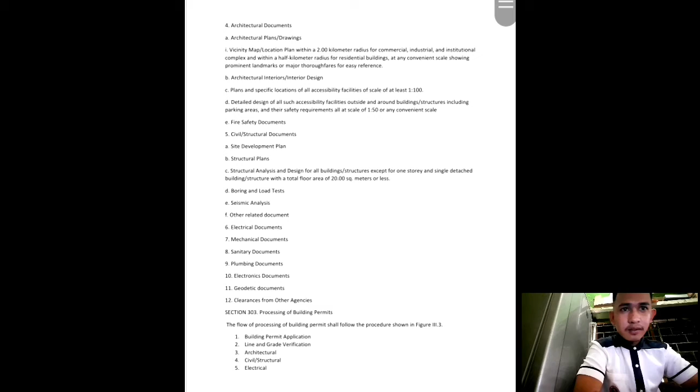D, Detailed design of all such accessibility facilities outside and around the building structure, including parking areas and their safety requirements, all at a scale of 1:50 or any convenient scale. Letter E, Fire safety documents.

Number 5, Civil or structural documents. A, Site development plan. B, Structural plan. C, Structural analysis and design for all buildings or structures, except for one-story and single detached buildings or structures with a total area of 20 square meters or less. D, Boring and load test.

E, Seismic analysis. F, Other related documents. 6, Electrical documents. 7, Mechanical documents. 8, Sanitary documents. 9, Plumbing documents. 10, Electronic. 11, Geodetic.

12, Clearance from other agencies. So let's proceed to Section 303, Processing of Building Permits. The flow of processing building permit shall follow the procedures shown: Building permit application, line and grade verification, architectural, civil, structural, electrical, mechanical, sanitary, plumbing, electronics, and fire requirements.

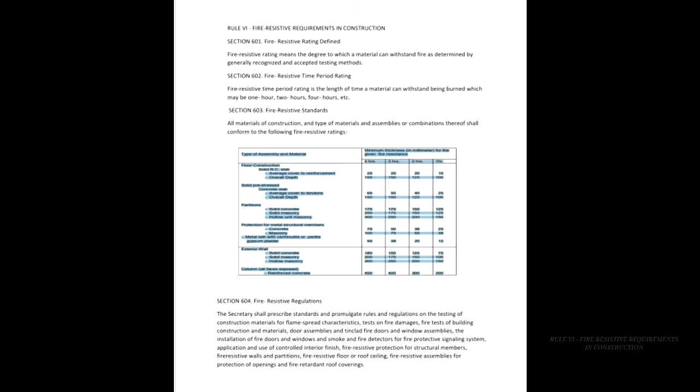So let's proceed. Rule 6, fire resistive requirement in construction. Section 601, fire resistive rating defined. Fire resistive rating means the degree to which a material can withstand fire as determined by generally recognized and accepted testing methods.

Section 602, fire resistive time period rating. Fire resistive time period rating is the length of time a material can withstand being burned, which may be 1 hour, 2 hours, 4 hours, etc.

Section 603, fire resistive standard. All materials of construction, types of materials, and assemblies or combinations thereof shall conform to the following fire resistive ratings. So here's the figure.

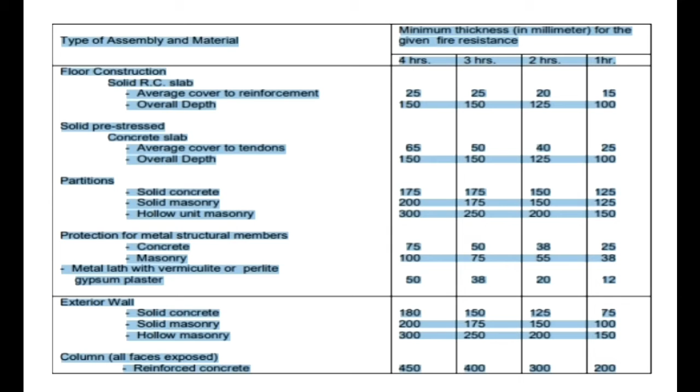So let's proceed. Section 604, fire resistive regulation. The Secretary shall prescribe the standard and promulgate rules and regulations on the testing of construction materials for flame spread characteristics, tests on fire damage, fire tests of building construction and materials, door assemblies and tin-clad fire doors and window assemblies, the installation of fire doors and windows and smoke and fire detectors for fire protective signaling systems, application and use of control interior finish, fire resistive protection for structural members, fire resistive walls and partitions, fire resistive floor or roof ceiling, fire resistive assemblies for protection of openings, and fire retardant roof coverings.

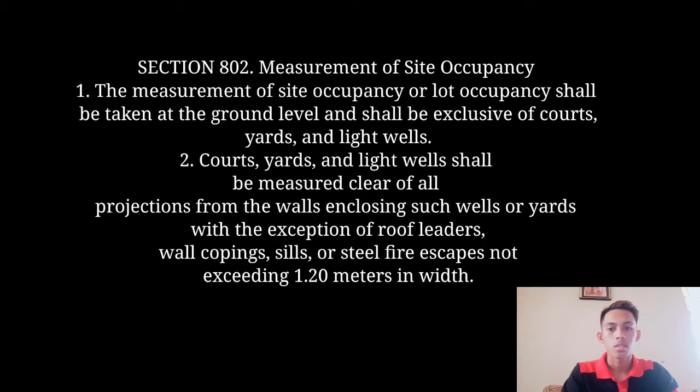For Section 803, percentage of site occupancy. Percentage of site occupancy or PSO shall be taken at the ground level. TOSL, or total open spaces within lot, consists of ISA, or impervious surface area, and USA, or unpaved surface area. The table illustrates the manner of determining the maximum allowable PSO, ISA, and also the minimum USA and the total open spaces within lot.

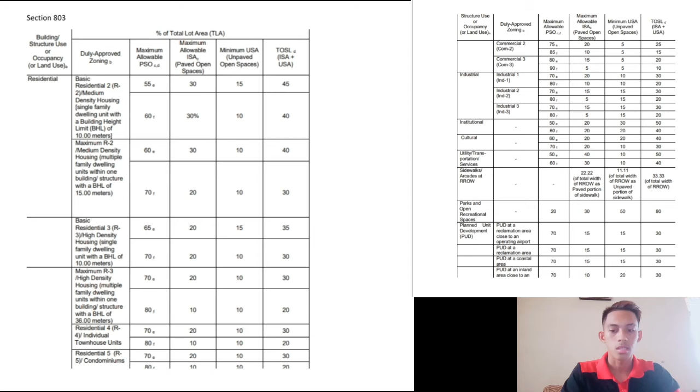Structures, use, or land occupancy like residential, commercial, industrial, institutional, cultural, utility, transportation, services, sidewalks, RROW or road right of way, parks and recreational spaces, planned unit development, and cemetery has different percentage of PSO, ISA, and USA depending on land use, as shown in the table, while TOSL or total open spaces is just the total of ISA and USA.

Now for Section 804, size and dimensions of courts. Minimum sizes of courts and yards and their least dimensions shall be governed by the type of construction. The minimum horizontal dimensions of courts and yards shall not be less than 2 meters, and all inner courts shall be connected to a yard, with a minimum width of 1.2 meters.

Open spaces can be located anywhere provided that maximum light and ventilation is met. Table 8.2 shows the measurement of the minimum setbacks of residential buildings or structures. We can see that R1, R2, R3, R4, and R5 are different types of residential use, and the yard measurements for R1 are 4.5 meters, 2 meters, and 2 meters for front, side, and rear sides respectively. You can see the measurements for R2, R3, R4, and R5 in the table as well.

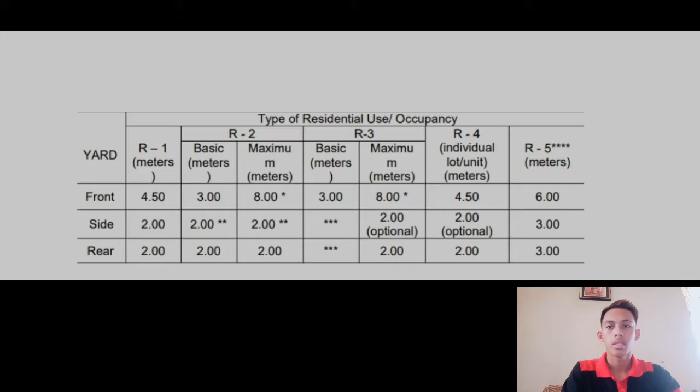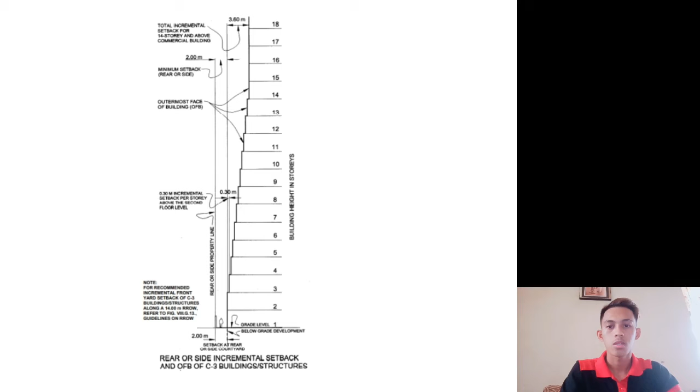Setbacks for commercial, industrial, institutional, and recreational buildings depend on the road right of way width in meters. Every court shall have a width of not less than 2 meters for one or two story buildings, or more for buildings of more than 2 stories in height. The minimum width of the rear side court shall be increased by 300 millimeters for each additional story up to 14 stories. In case of conflict in the provisions on lighting and ventilation under this rule, the more stringent restriction must prevail.

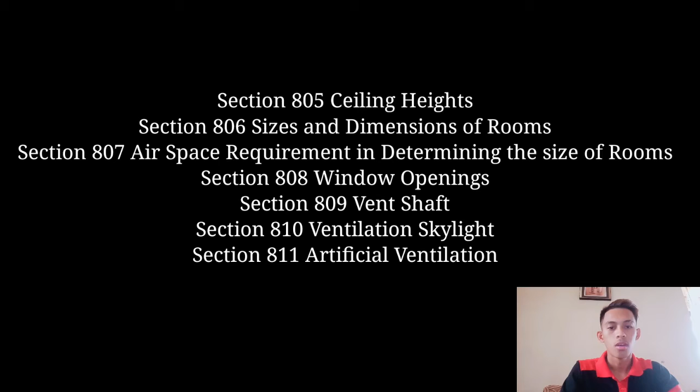For Section 805, ceiling heights: for habitable rooms, ceiling heights must not be less than 2.4 meters measured from floor to ceiling. For buildings of more than 1 story, the minimum ceiling height of the first story shall be 2.7 meters, the second story 2.4 meters, and succeeding stories a minimum height of 2.1 meters. The mezzanine floor, which is the floor between the first and second floor, should have a ceiling of not less than 1.8 meters.

For Section 806, sizes and dimensions of rooms: minimum sizes of rooms and their least horizontal dimension shall be as follows. For rooms for human habitation, 6 square meters with at least dimensions of 2 meters. For kitchen, 3 square meters with a least dimension of 1.5 meters. And for bath and toilet, 1.2 square meters with a least dimension of 900 millimeters.

Section 807, air space requirement, is for determining the size of rooms. Minimum air space shall be provided as follows: school rooms, 3 cubic meters with 1 square meter of floor area per person. Workshops, factories, and offices, 12 cubic meters of air space per person. And habitable rooms, 14 cubic meters of air space per person.

Section 808, window openings: a room intended for any use not provided with an artificial ventilation system shall be provided with a window or windows with a total free area of openings equal to at least 10% of the floor area. Toilets and bathrooms, laundry rooms, and similar rooms shall be provided with a window or windows with an area not less than 1/20th of the floor area of such rooms, provided that such opening shall not be less than 240 square millimeters.

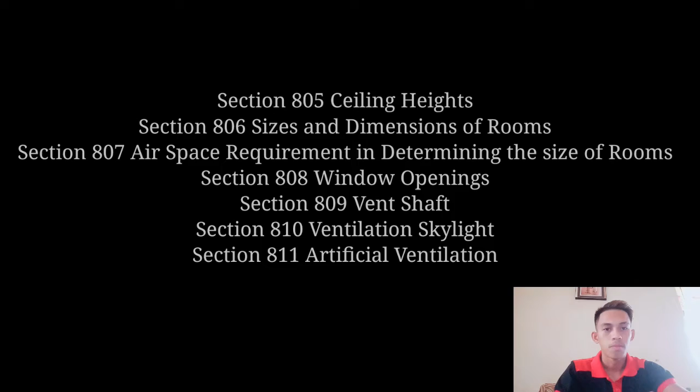Rule 13, Electrical and Mechanical Regulations. Section 1301.

Electrical Regulations. All electrical systems, equipment, and installations mentioned in the Code shall conform to the provisions of the PEC Part 1 and Part 2 as adopted by the Board of Electrical Engineering, pursuant to RA 7920, otherwise known as the Philippine Electrical Engineering Law.

1. Power service entrance: it is required to supply power source including transformers, poles, and supporting structures. 2. Attachment and clearance from buildings: it covers power lines and cables, transformers, and is approved by a professional electrical engineer.

3. Open supply conductors attached to buildings. Permanent attachment of open supply conductors to any class of buildings is necessary and should be guarded or made inaccessible if conductors carry 300 volts or more.

4. Conductors passing by or over buildings, unguarded or accessible. Supply conductors with voltage in excess of 300 volts either beside or over a building should meet the requirements of horizontal and vertical clearances, as shown in the table.

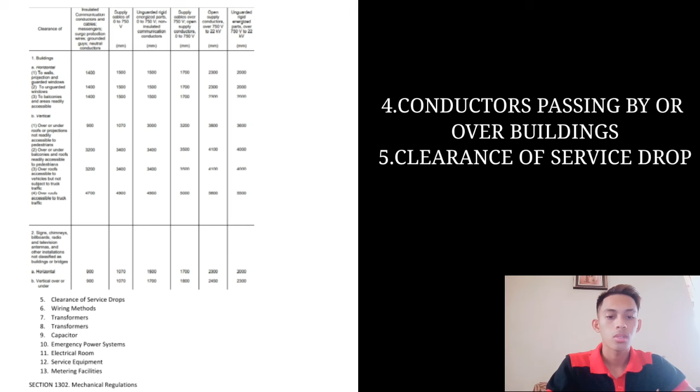Clearance of service drops: it should not be readily accessible when not in excess of 600 volts. It should have a clearance of 2.5 meters from the high points of the roof, 3 meters clearance from ground or any platform, and 1 meter horizontal clearance from windows, doors, porches, and fire escapes.

6. Wiring methods: abandoned lines shall be removed and line equipment shall be free from any attachments. Transformers rated 15 kV shall be installed inside a transformer vault, and it should also be guarded.

8. Provision for transformer vault: it should be constructed in accordance with PEC Part 1. 9. Capacitor: installation of capacitors in hazardous locations shall comply as prescribed in PEC Part 1, or Philippine Electrical Code Part 1.

10. Emergency power system shall be provided for safety to life when electric power is interrupted, and shall have adequate capacity for the emergency load.

Electrical room should have adequate space or area provided at locations where panel boards, breakers, switch gears, and other electrical equipment are installed. 12. Service equipment should have adequate space and be located in a readily accessible area. For metering facilities, a metering vault required for primary service shall be provided. Ventilation and metering space shall be provided for single or multi-metering.

Now for Section 1302, Mechanical Regulations. 1. All mechanical systems, equipment, and installations mentioned in the Code shall conform to the provisions of the Philippine Mechanical Code as adopted by the Board of Mechanical Engineering, pursuant to RA 8495 as amended, otherwise known as the Philippine Mechanical Engineering Law.

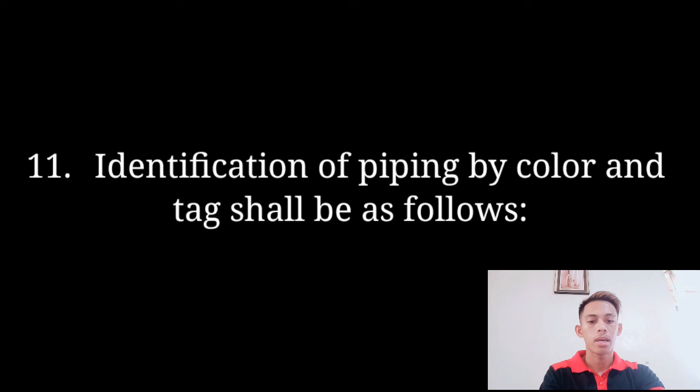Piping for fuel, gas, and steam. Piping shall run parallel as much as possible to building walls. Group piping shall be supported on racks, and pipes 100 mm in diameter and above shall be flanged. Identification of piping by color and tag shall be as follows, as seen in the table.